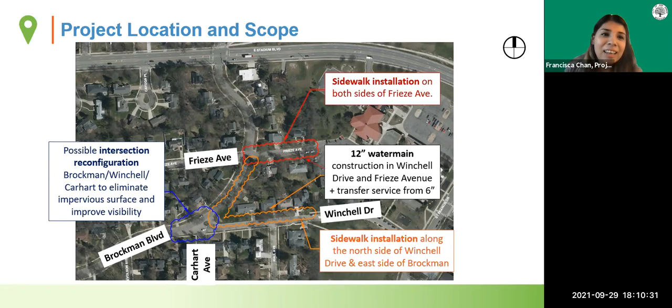So the main reason for the installation of the water main would be for improving water quality and water flow. This main has a history of breakage, so that's a good reason that we're installing a new one. Going from a 6-inch water main to a 12-inch will definitely improve everyone's water quality and water flow. We're also hoping to improve fire hydrant coverage and capacity.

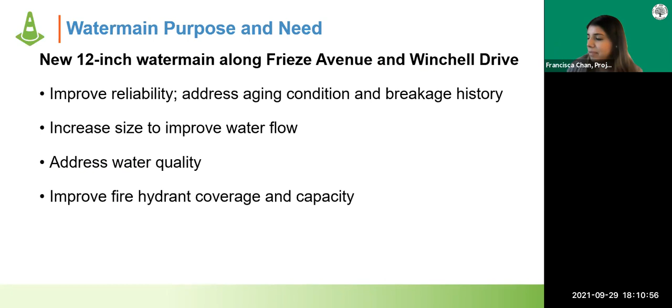In terms of the sidewalk installation, again, this is consistent with Ann Arbor's moving together towards Vision Zero. We're very excited that we get to do this joint project including the sidewalk there. It will improve pedestrian safety, and we hope it will encourage more active transportation in the community. If you want more information about sidewalks and our sidewalk gap elimination program, I've included the link down there.

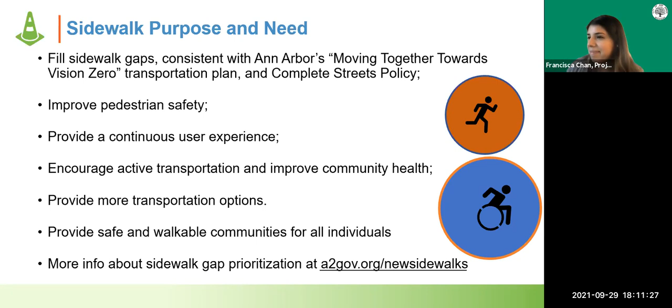As mentioned earlier, we did have a survey done in May 2021. This survey was given to most of the properties near the streets affected by the future construction, and some residents expressed safety concerns. So we have thought about possible design changes, which I'll go over in the rest of the presentation.

Just to highlight, the comment bubbles show some of the feedback we heard from that May 2021 survey, and that is why we're continuing this discussion here tonight. There was a range of perspectives. We only had a few respondents, but some said the intersection is fine, while others felt it is not safe or that it's confusing. That's why this conversation is continuing, and we're looking for additional feedback.

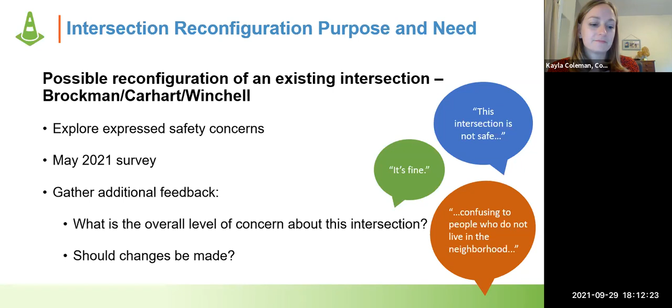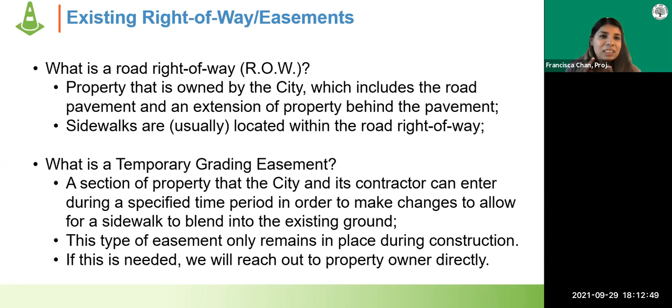I also wanted to explain what the road right-of-way is. That's the property owned by the city, which includes the road, the pavement, and usually the extension of property behind the pavement. Usually sidewalks are located within the road right-of-way. For these locations, Frieze, Brockman, and Winchell, they don't have sidewalks, but I want to show you a map of our current right-of-way. This is your current location, Frieze and Brockman. I know it's a little hard to read, but the pink line details the city's current right-of-way.

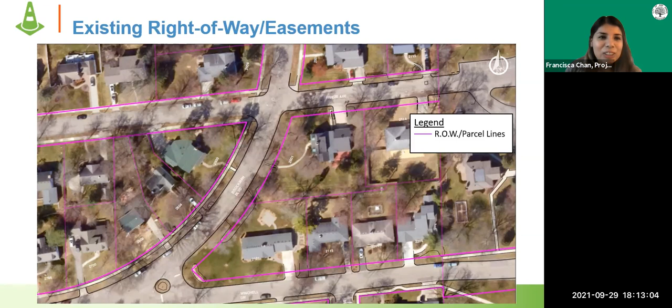So moving on, these are the existing conditions. This picture on the left is looking east on Frieze Avenue. As you can see, there is no sidewalk, so we want to install one there. The other picture on the right is looking east on Winchell Drive, where we would like to install a sidewalk on the north-hand side.

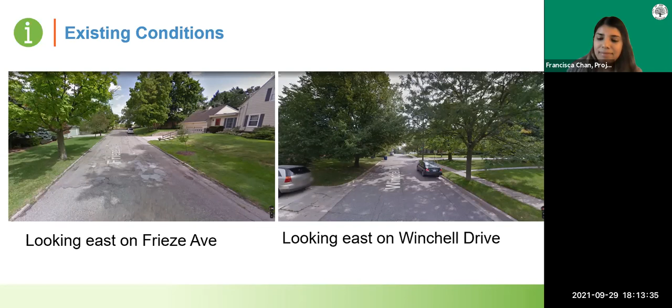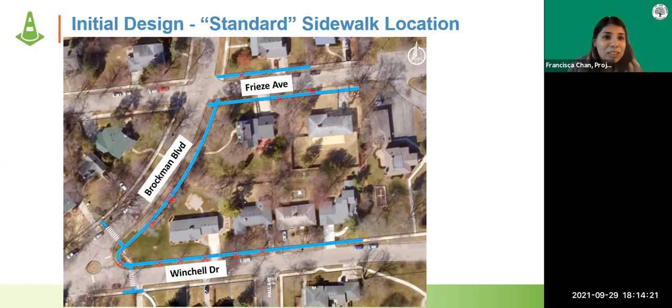On Winchell Drive, I want to focus a little more because there was significant tree impact with our original proposed alignment. So we decided to explore different options and see if maybe this could be an area where we make an exception and move the sidewalk onto the road. But I want to go over the different alternatives of what that would mean—it would mean losing on-street parking. So we're going to explore those two different options for Winchell Drive. Brockman and Frieze are already at the ideal alignment, so those are pretty set for now, but we definitely would like your feedback on those as well. If you have specific questions, we can address those at the Q&A, or you can email me later.

This is the proposed alternative number 1, again using the standard 6 inches off the right-of-way. As you can tell on Winchell Drive, those X's are tree removals, which would be necessary because they're right on the sidewalk location.

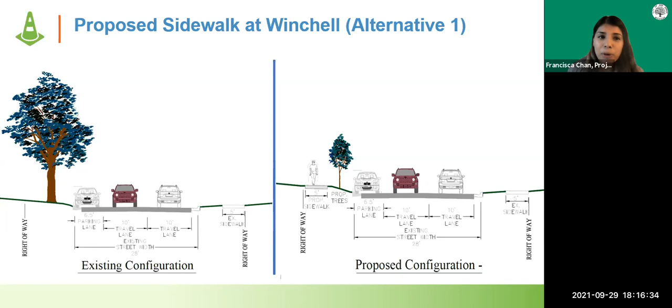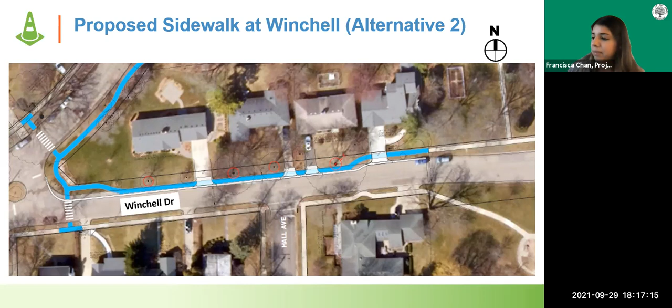Alternative number 2 moves the alignment of the sidewalk onto the roadway. This way we would maintain most of the trees—most are likely able to stay. The red circles show a 5-foot radius from the center of each tree, and usually we would cut down trees within 5 feet of the sidewalk. But in this case, there's already a curb, so since the roots are already contained by the curb, we would remove the curb and just install the sidewalk, and most of the trees would be able to stay. But again, this would eliminate parking, so that's one consequence of this alignment.

So I wanted to show you a cross section of alternative number 2. On the left-hand side, you have your existing configuration - there's the parking lane and the trees in the right of way. On the right-hand side, you have the new configuration: the 5-foot sidewalk and the trees in the right of way, but the parking is removed.

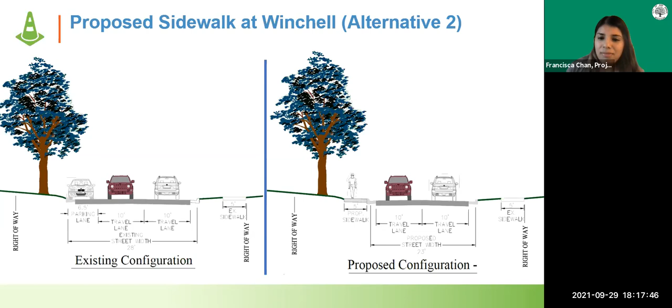So to summarize, we're looking at 2 alternatives right now for Winchell Drive. Alternative number 1: keep on-street parking, remove most trees within the right-of-way, and include tree replanting. So even though we are removing trees, we will replant them. Alternative number 2 would be remove on-street parking. Tree removals are less likely.

This will be part of the survey that was mentioned in the beginning, and we will give you a link at the end of the meeting today so that you can fill out that survey. So this would be a choice that we're asking the community to vote on, and also to express your concerns about this alignment or anything else.

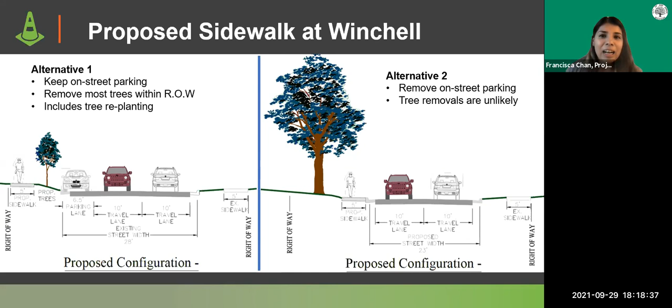So moving on, I also wanted to talk about the Brockman, Carhart, Winchell intersection. So this is the intersection I'm referring to. Looking northeast on Brockman Boulevard, we have Winchell Drive, Brockman, and Carhart - it's kind of a little hard to see, but it's a 3-street intersection.

The current situation is that there is a small island in the center, and on the Winchell Brockman side, there is no sidewalk, so we would be installing that. The current scope is to install the sidewalk, and also to have some striping on those 2 streets, Brockman and Winchell Drive.

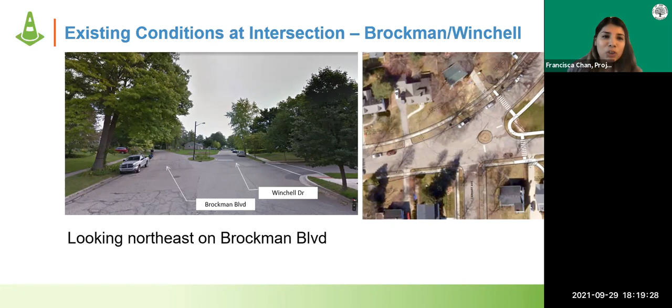So I wanted to cover some concepts that we came up with as we thought about the feedback we received from the community regarding possible concerns at this intersection. Again, the existing condition is right here on the left - there is the median in the center.

Some concepts that we came up with would be the one on the right, concept number 1. It would be removing the island in the center, restriping, repaving, and new curbing. So it's a pretty expensive addition - it would cost around $200 to $300K.

This is in addition to the original project scope, which is the water main and the sidewalk installation. That would almost double the project cost, but we would be able to add it if it is a significant concern in the community. That's something we really want your input on, so it will be part of the survey given at the end.

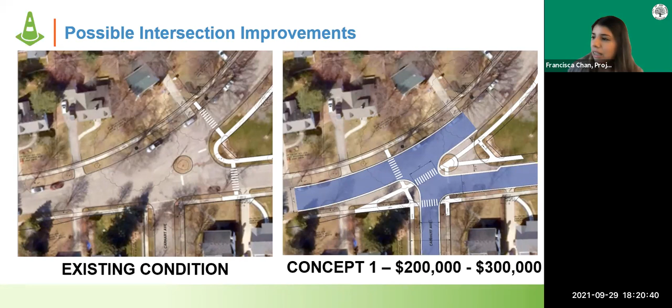As we're talking about the amount of money, could you just clarify that that is not a special assessment or a direct cost to the property owner? That would be part of the project cost that is funded through existing city funds.

Right, I didn't go over funding. Part of the sidewalk installation is covered by the sidewalk millage. So if we were to do this intersection work, we would find funding for this. It is no longer the responsibility of the property owner to pay for new sidewalk, so we would find funding for this.

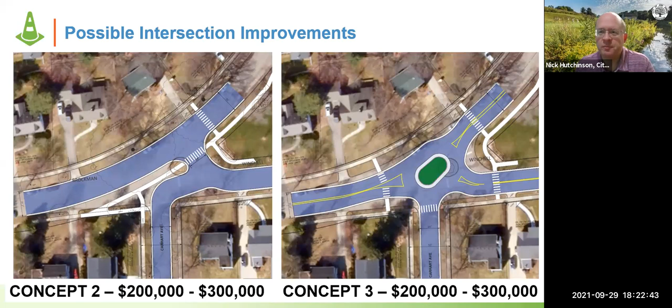Yes, thanks for that clarification. That's correct. I think the third concept is pretty self-explanatory - it's a roundabout, with very clear striping and pedestrian walkways. There's also a median in the center, which would probably be a concrete median.

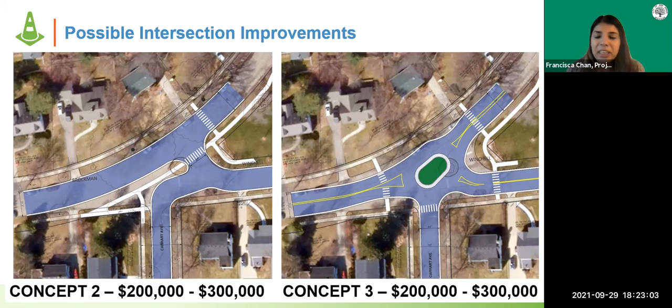So moving on to design and construction. Possible impacts include some changes to the drive approaches, just because the trenching work for the water installation might come close. Right now almost all the trenching is in the road, but there is some that is kind of close to the driveway. If that happens, we of course would repair your driveway and make it as good or better than it was before.

Some trees and landscaping features would be removed or disturbed. Again, for Winchell Drive, the on-street parking may be removed. It depends which alternative is decided upon.

Also, property owners would be responsible for winter maintenance. This means snow removal and ice clearing for the sidewalk in front of their property. I want to reiterate that our team will make every effort to avoid any private property impacts and will coordinate directly with that property owner as needed.

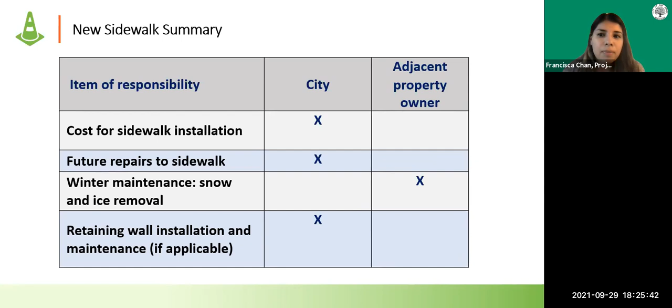For this construction of the sidewalk, there's only one property owner that is affected or might have a retaining wall, and I will reach out to them directly to coordinate with them and to see if they would want a retaining wall or whether there's another option. So it's not really applicable for any of the other properties.

Also, other construction impacts would be access and services, but I just want to clarify, even though the streets will be closed to through traffic, there will be local access for residents. Traffic would be detoured, but of course for all the residents, you still have access to your driveway and to the street. There are some exceptions. If we're doing construction right in front of your driveway, it will be closed, but we will notify you directly in advance for that closure, and there shouldn't be that many.

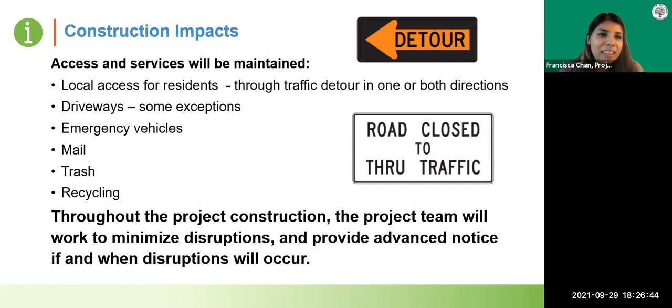There will also be access to all your regular services. So mail, trash, recycling, and emergency vehicles will still have access. And we will do our best to minimize disruptions and to notify the residents of any negative impacts that will affect your property during construction.

Like I mentioned earlier, on-street parking restrictions will occur. I know right now there is parking allowed on those streets, but there's also other residential parking available on other streets like Frieze on the other side of Brockman, or maybe Carhart. So those would be available, but you can always park in your own driveway. Like I said, the driveway is still accessible, even if on-street parking is no longer available during the construction duration.

Depending on the street and the level of construction, it will vary. Frieze has the most amount of construction, so 3 to 6 weeks, versus Brockman and Winchell, it's more like 2 to 3 weeks. As the project progresses, more information will be given in terms of schedule. Also, construction will generate dust and noise during working hours. We apologize, we will do our best to keep that at a minimal.

There will also be water shut off while we're reconnecting to the existing water main. There will be one day where that will happen, and you will be notified at least 3 days in advance, and also the day of. That is one of the 2 water shutoffs. There's only this one, and there will be one other time where for 1 hour water will be shut off while the water service is being reconnected to the water main. So that will be for 1 hour. 1 day and then 1 hour. And again, we will communicate when that is.

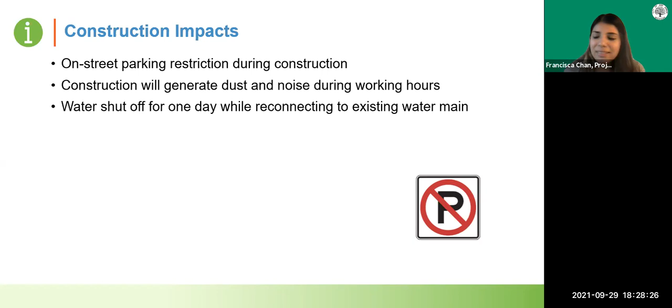The water main installation will involve significant trenching, especially on Frieze. Brockman and Winchell will have much less, but we'll still need to install the new water main 6 feet deep. Those areas will be restored and repatched afterward.

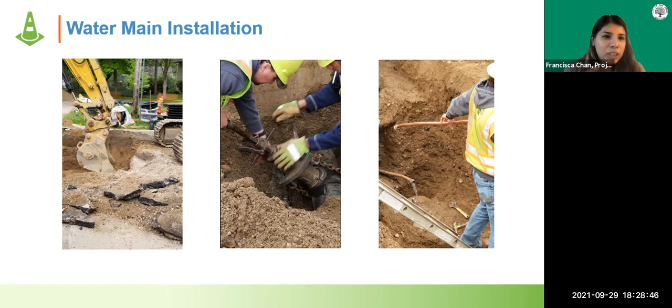Next steps: right now we're hoping to finalize design by November or December. Once finalized, we'll get a construction company to bid on the project and start planning. We're hoping construction will start in summer. We know there are schools nearby, so we want to time it so it begins once school is let out.

If you want more information and regular project updates, I'd highly encourage you to sign up for email notifications. This link is on our website at a2gov.org/Winchell - just click that sign up for Gov Delivery link, and we can send you email updates. This covers both the construction phase and the design phase.

Next steps: this meeting recording will be posted on the website one week from today. Also, we have that online survey we mentioned - if you can fill that out in the next two weeks, you have until October 13th, and we'll put the link in the chat at the end. The sidewalk and intersection design decisions will consider this survey and all the responses and questions you have. So please let us know at the end what questions or concerns you have.

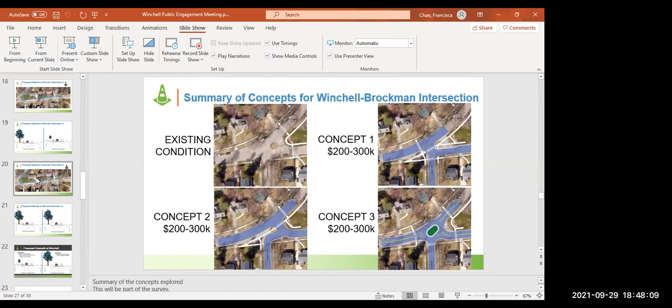Okay, so 2 X's missing. And I guess I just don't understand the need. I have a corner lot, so there's going to be so much responsibility for shoveling that, which I was not considering when I bought my home. I have a bad back, so I didn't think this was going to be a problem. So I don't really understand why, if we could just fill in some gaps on Frieze and we have sidewalk on the other side, why we need to uproot so many people's trees and gardens and things. Just seems like a lot. That's all I have to say.

Okay, thank you Alana, I appreciate those comments. In summary: the comment about the intersection reconfiguration and concern about the amount of money that would require, and also noting if there is a change to be made, an interest in concept 3, the one that includes the green space to maintain some of that aesthetic of your neighborhood. And then the note on need to reevaluate and look more closely at tree impacts along Brockman, concern that some additional trees may be impacted there, as well as concern about winter maintenance responsibility for the adjacent property owner for new sidewalks. Thank you, Alana.

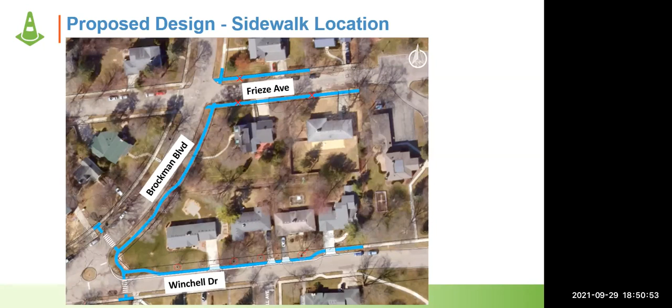So it's difficult from a resident perspective to give feedback on these specific concepts if we don't know more specifics on whether that island would be a full concrete island, which really distinctly changes the character of the neighborhood. If you couple that with the reduction of street space on Winchell Drive, it almost creates more of a concrete jungle feel rather than the existing green space and center to the neighborhood. So if there's additional clarification on what choices would need to be made for concept 3 to retain that green space character while addressing the impervious concrete problem identified in the first slide, that would help before providing feedback on one of these solutions.

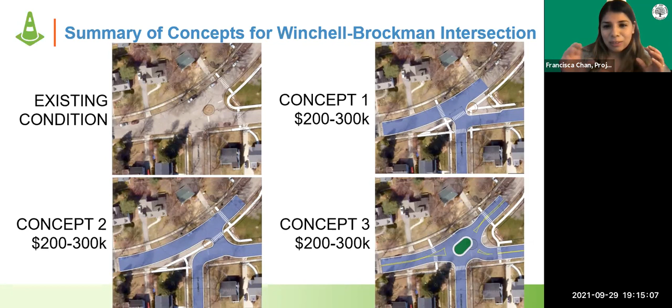Could Fran perhaps respond to that? Yes, what we're doing at Winchell is more of an exception because we noticed there are many trees that we would be cutting down. Normally the standard is to build 5-foot sidewalks within our right of way, not on the road. We're doing an exception here because we want to preserve the trees, and for a short length we can narrow the street, remove the parking, and build a sidewalk there.

I would add to that concept on Winchell: a sidewalk behind the curb. A sidewalk in the street, if that's what is meant by that comment, would not generally be considered something we would consider safe to do. We would want it separated from the road, at least by an elevation.

I would also add that along Brockman, we have looked at an alignment for a sidewalk that does not need to remove any trees. We can certainly take a closer look at that and talk it through with our forestry expert, but we don't believe any trees would need to be removed along Brockman.

Okay, thank you. And was there a survey regarding the cars parking on Winchell and the potential for on-street parking removal? It seems there's a number of cars that park on Winchell during ball season, and both sides are often parked full. Where would ball teams park? Where would school parents park during overflow times? Is there any commentary about the amount of space available and the demand in that area?

If there's anything we can add on how much surveying we did of the on-street parking currently, that'd be helpful. Just to throw something out quickly, maybe Cynthia can weigh in, but I think that goes down to what Cynthia was talking about earlier, about potentially lifting the parking restriction further down next to the park. If that's the case, it opens up a whole lot of additional parking spaces.

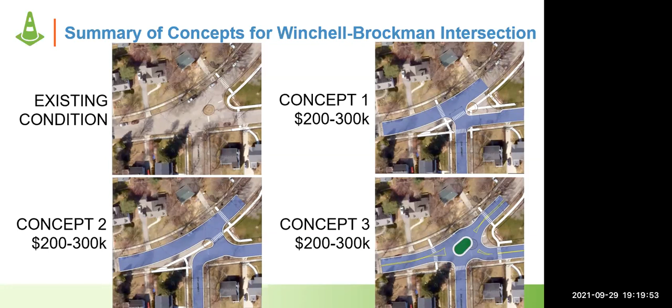I'll jump in there real quick. We would have crossings at Frieze and Brockman as part of this. Once the sidewalks go in, there would be an actual place to cross to, and we would put the appropriate markings in.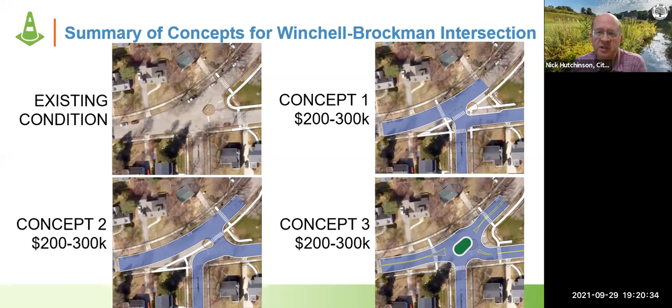I'll also make another pitch, since you mentioned the sidewalk gaps further west on Brockman, for taking a look at the sidewalk gap program. Again, a2gov.org/sidewalks. There is a place in there regarding a petition. The petition can help in our prioritization system for a sidewalk gap to score more points and raise the priority. So please consider that, maybe take a look at that webpage as well.

Thanks, Nick. I see one comment here: the survey ends after 2 weeks, but the session won't appear for a week. Can we extend the survey to give people time to digest the proposals?

I do expect that this presentation can likely be posted, if not tomorrow, the next day. We say a week as our standard to allow for any case where someone is out of the office or unable to transfer it — we have to work with our CTN cable television staff to get the recording posted. But it's usually a really quick turnaround, so we will get working on this first thing tomorrow morning, and I hope to have it live for you very soon.

And the presentation slides will absolutely be posted tomorrow. Those we can do right away and it doesn't require other staff coordination. You'll have access to those proposals right away.

I hope that helps. A few more comments: okay, this is about the sidewalk being closer to the road on Winchell, and clarification about the parking. I think Cynthia had done a more detailed response on this, but maybe we can briefly reiterate what this would mean for parking between Carhartt and Hall on Winchell. Does this mean there will be no parking on either side? And I'm not familiar exactly with the location of the park you were referencing, Cynthia, as a potential for bringing parking back, so maybe you can address whether that provides some parking in that stretch.

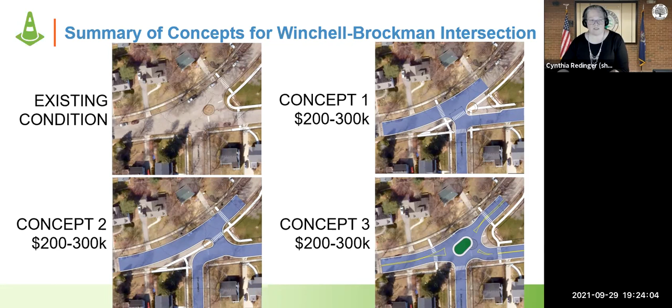As we're moving the design forward, the transportation staff will take a look at that intersection and make determinations as far as what type of pavement markings and signage need to be in place out there.

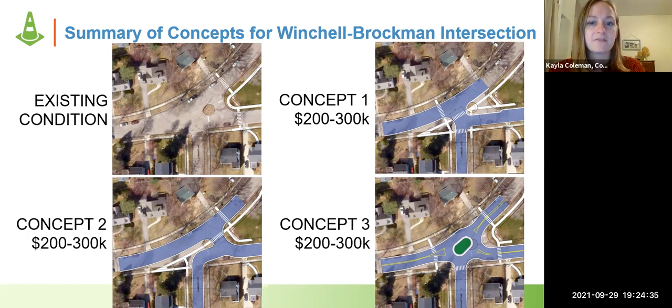This was a follow-up comment from Ken earlier when we talked about vegetation in the island, the roundabout island of concept 3. Ken noted that planting a tree in that spot might not be good for visibility, so I think that may have been addressed, perhaps with a different type of vegetation, not necessarily a tree. Cynthia, is there anything you want to clarify?

Sure, I'm happy to talk about plantings in the middle of roundabout islands. In central islands it's actually recommended to have vertical elements, such as trees or tall grasses, that limit that straight line across the intersection sight line, because it helps reinforce the fact that in a roundabout you need to be looking in the circulating roadway. You're looking to the pedestrian space crossing in the direction you're approaching from, and you're looking left for approaching vehicles. Having vertical things in the middle helps reinforce that look to the left, so you're not looking at the traffic across the street when you need to be looking to your left. So tall stuff in there is actually pretty okay.

Thanks, Cynthia, appreciate that clarification and additional information. There's one remaining written comment, and it was someone who wrote in about the crossing of Brockman from Carhartt. It's from an anonymous attendee. Unfortunately, the way these come in, you may have been responding to a question we were addressing at the time, but it doesn't show me which original statement that was linked to. So, crossing of Brockman from Carhartt — if anyone wants to write in further clarification on that, please do, or raise your hand and we can take a final comment.